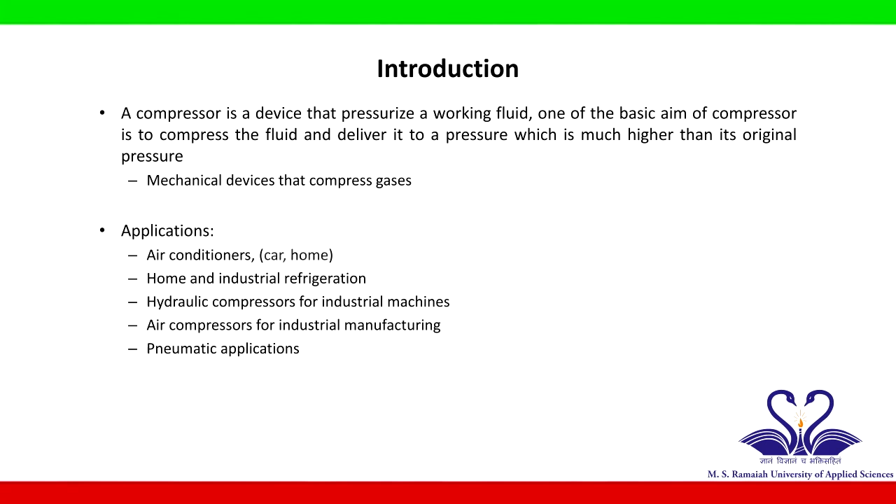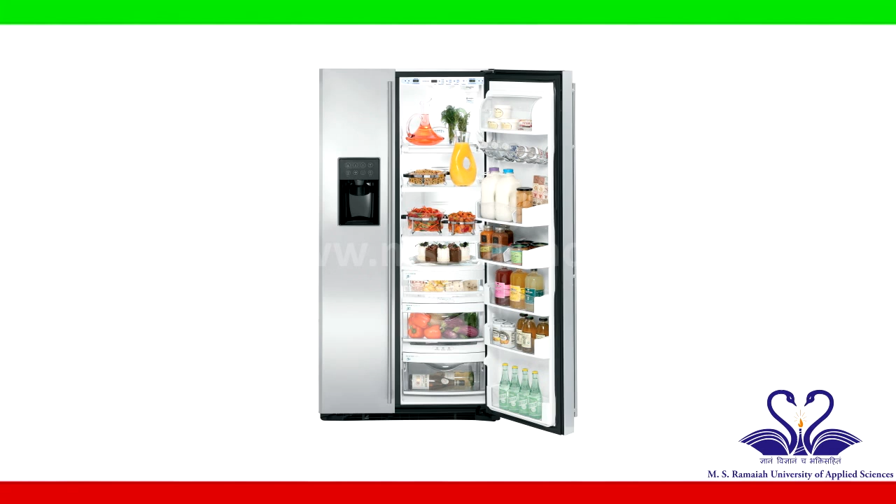Compressors are an important constituent in air conditioning, either domestic or industrial applications. Even in household refrigerators that follow the vapor compression refrigeration cycle, compressors are very much essential.

In refinery and process industries, compressors are used for handling highly volatile gases. For example, ammonia boils at about minus 33 degrees Celsius at atmospheric pressure. Hence, the product is compressed at high pressure and stored in high pressure vessels.

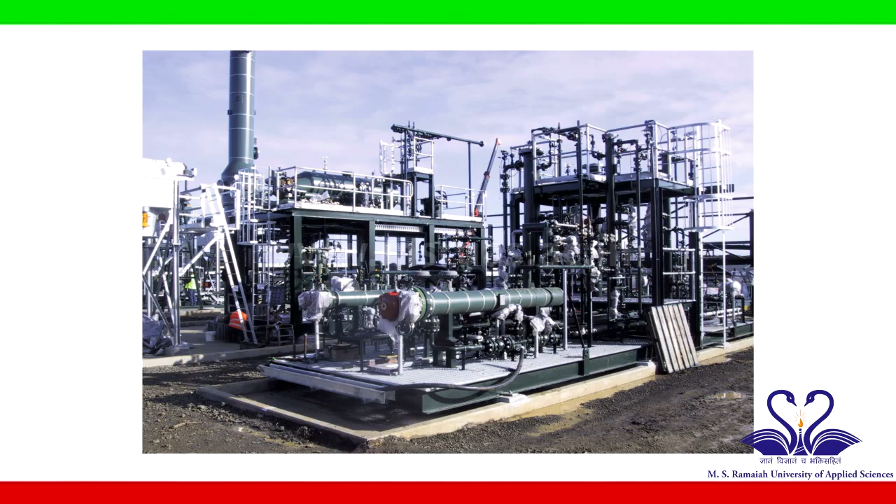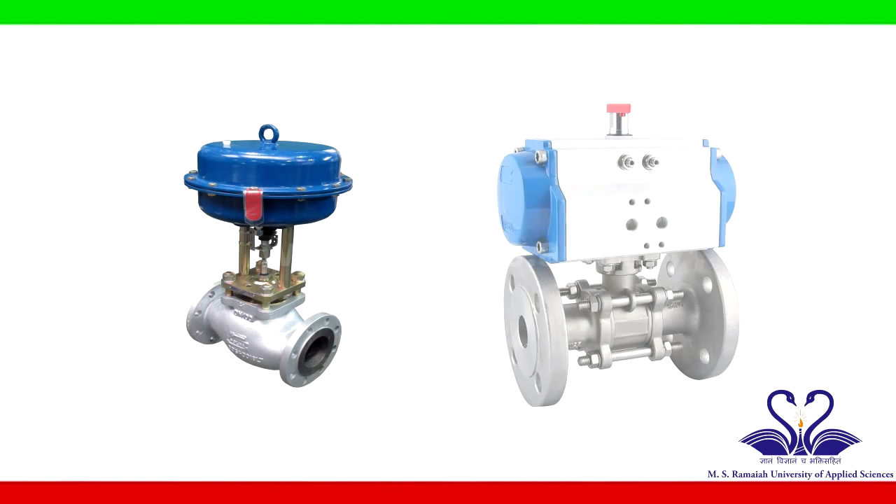Compressed air is also used in utility applications like cleaning of automobile air filters. Compressed air is required in actuating pneumatic and air control valves. By varying the air pressure to the actuators of the valves, different valve openings can be achieved.

Compressed air is also used in compressed air energy storage. In a power plant, during peak load times, high energy is required. During a period when there is very much less electric load, the surplus energy available can be stored in the form of compressed air. During peak load, the energy from the compressed air can be used to provide additional power.

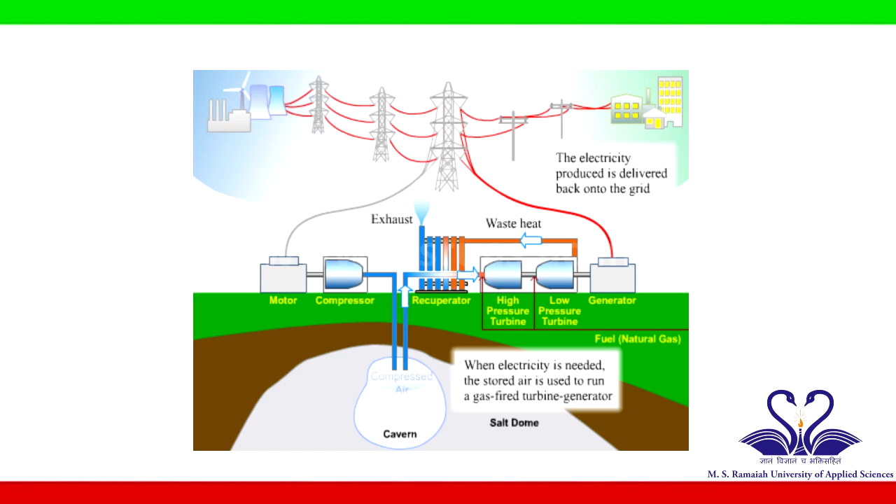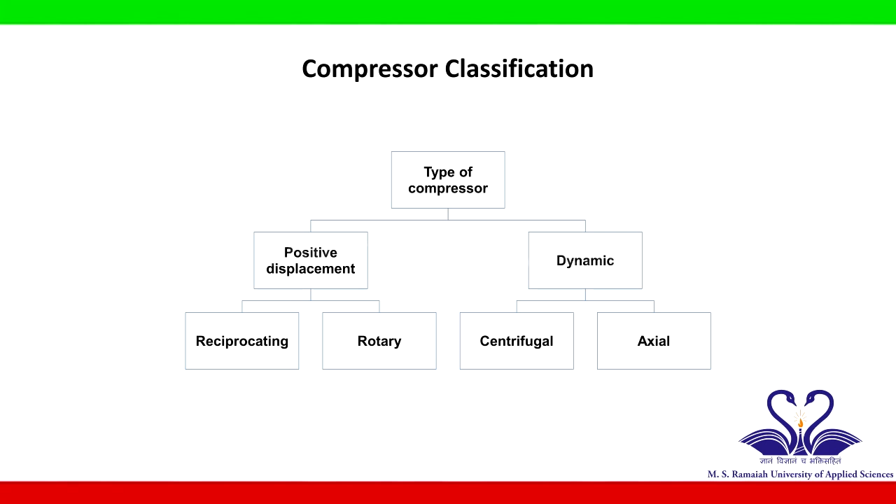Compressors may be classified as positive displacement and dynamic compressors. Positive displacement compressors can be further subclassified as reciprocating and rotary compressors. A dynamic compressor can again be subclassified as centrifugal and axial compressor.

A dynamic compressor is a continuous flow compressor characterized by a rotating impeller that adds velocity and thus pressure to the fluid. It is widely used in chemical and petroleum refinery industries for specific services.

Positive displacement compressors cause movement by trapping a fixed amount of air, then forcing or displacing that trapped volume into the discharge pipe.

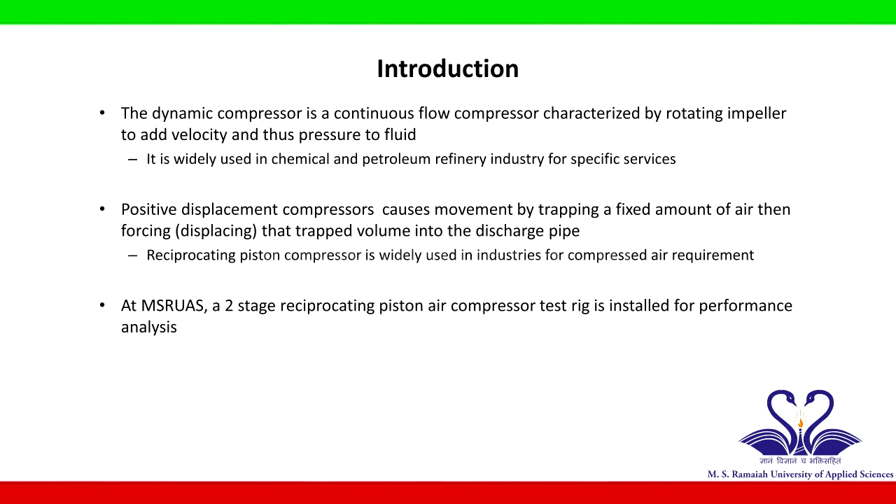Reciprocating piston compressors are widely used in industries for compressed air requirements. At MSRUAS, a two-stage reciprocating piston air compressor test rig is installed for performance analysis.

Before conducting the experiment, it is very important to understand the thermodynamics behind reciprocating compression. A thermodynamic state of a system is a condition identified by a set of state variables like pressure, temperature, etc. A thermodynamic process is any change that a system undergoes from one equilibrium state to another.

Some of the important thermodynamic processes are: isobaric process, where pressure remains constant; isochoric process, where volume remains constant; isentropic process, where entropy remains constant; and adiabatic process, where there is no exchange of heat between system and surroundings, or in other words, PV to the power gamma is a constant.

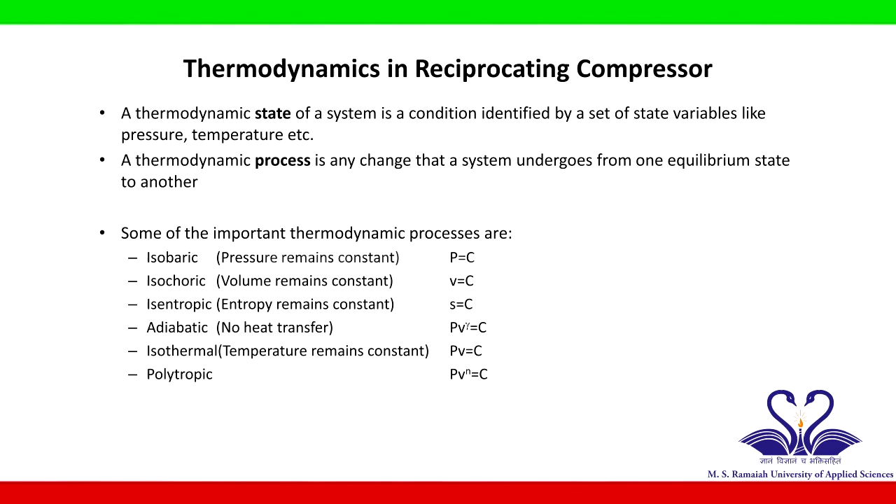Isothermal process, where temperature remains constant, or PV is a constant. And polytropic process, where PV to the power n is a constant, and n is the polytropic index.

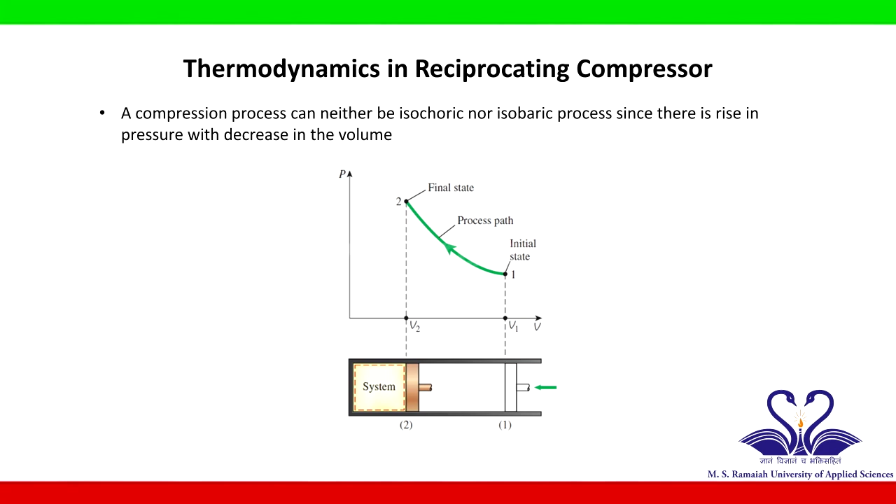A compression process can neither be isochoric nor isobaric, since there is a rise in pressure with a decrease in volume. Hence, the compression process may be one among the following. If the rise in pressure and decrease in volume of the system takes place at constant temperature, then the process may be isothermal.

If there is no heat transfer between system and surroundings, it can be an adiabatic process. If the adiabatic process is reversible, then the process becomes isentropic. If none of the above conditions follow, then the process can be just termed as polytropic with the polytropic index N. On a PV diagram, the isothermal lines have a lesser slope when compared to isentropic lines.

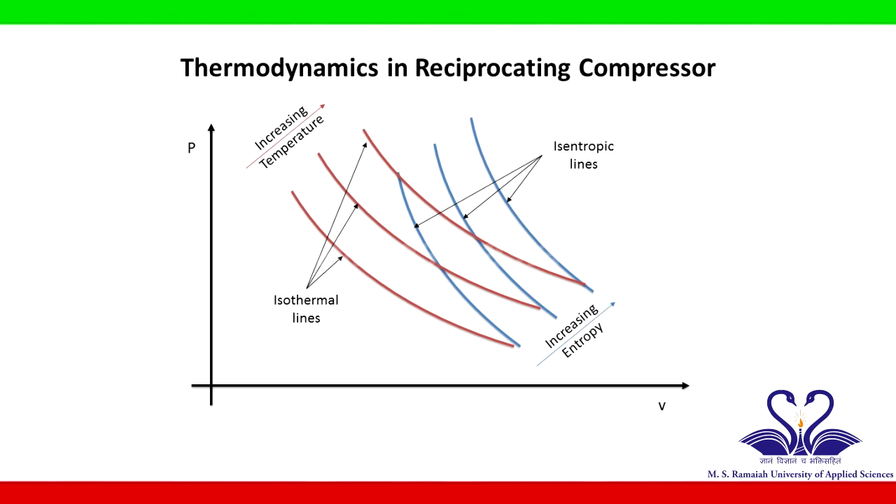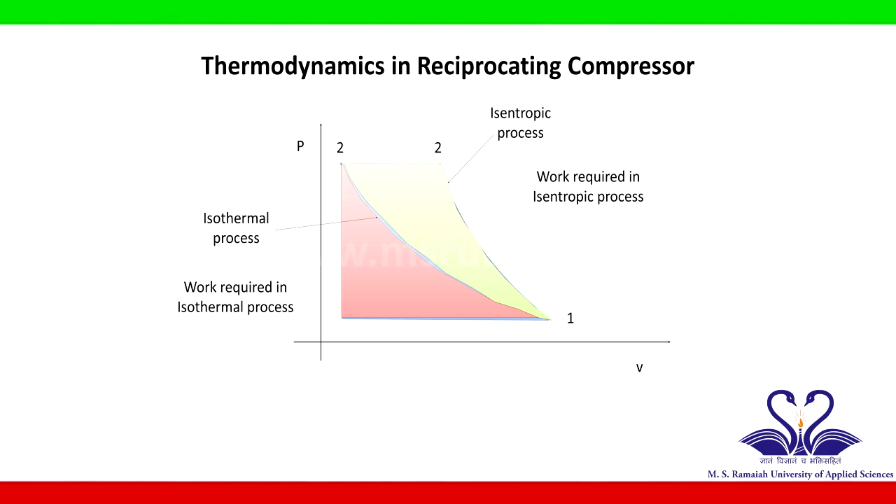The isothermal and isentropic lines can be observed in the figure. For a compression of a system from state 1 to state 2, the isentropic process requires higher work input compared with the isothermal process. It would be more efficient if the process operated at isothermal conditions. It is evident that during compression, the isothermal process requires less energy compared to the isentropic process.

In reality, the isothermal process is practically difficult to achieve, which is possible only at a quasi-static condition. An isentropic process is also not achievable, since the system entropy is increasing during compression.

Since the compression process happens very quickly, it can be assumed that the heat transfer between system and surrounding is negligible. Hence, the compression process can be suitably assumed to be adiabatic.

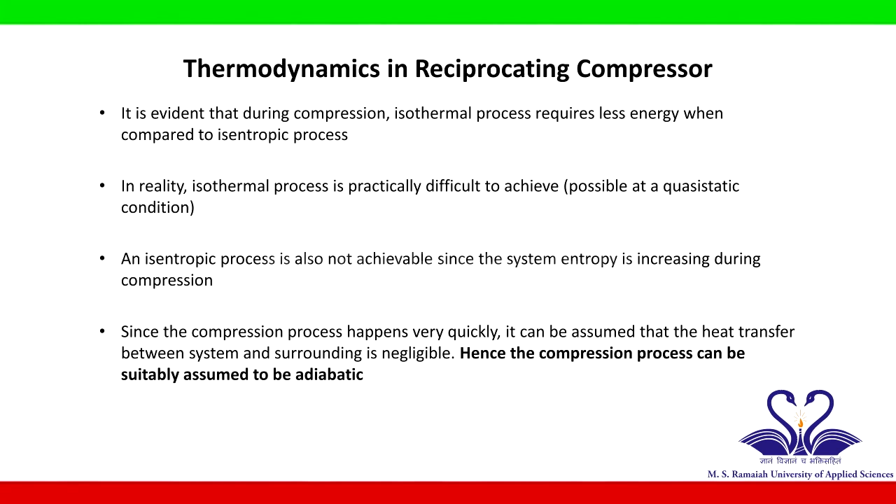The work done in a polytropic process can be written as W(1 to 2) equals N by (N minus 1) into M R T1 into (P2 by P1) to the power (N minus 1 by N) minus 1, where N is the polytropic index, gamma if adiabatic.

M is the mass of the system in kg. R is the gas constant for the gas in joule per kg Kelvin; for air, it is 287 joule per kg Kelvin. T1 is the temperature of the system before compression in Kelvin. P1 is the pressure of the system before compression in pascals. P2 is the pressure of the system after compression in pascals.

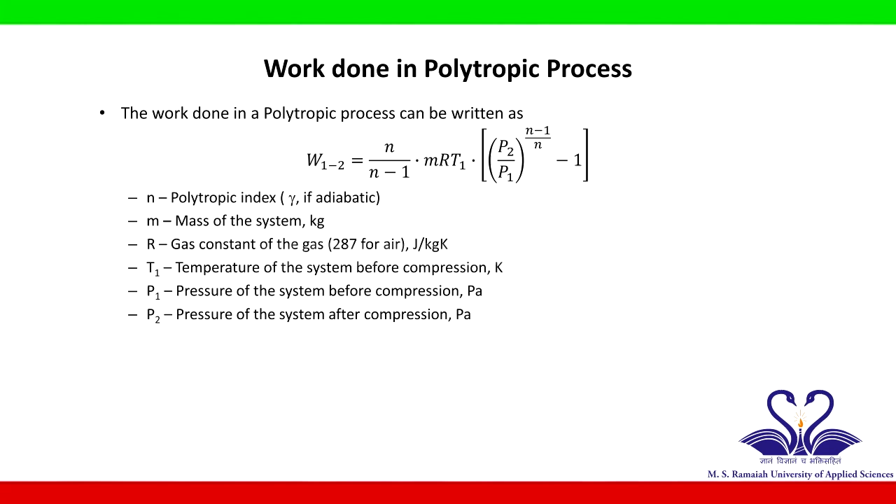The power output of the compressor can be calculated by replacing mass of the system by mass flow rate. Power(1 to 2) equals N by (N minus 1) into M-dot R T1 into (P2 by P1) to the power (N minus 1 by N) minus 1, where M-dot is the mass flow rate in kg per second.

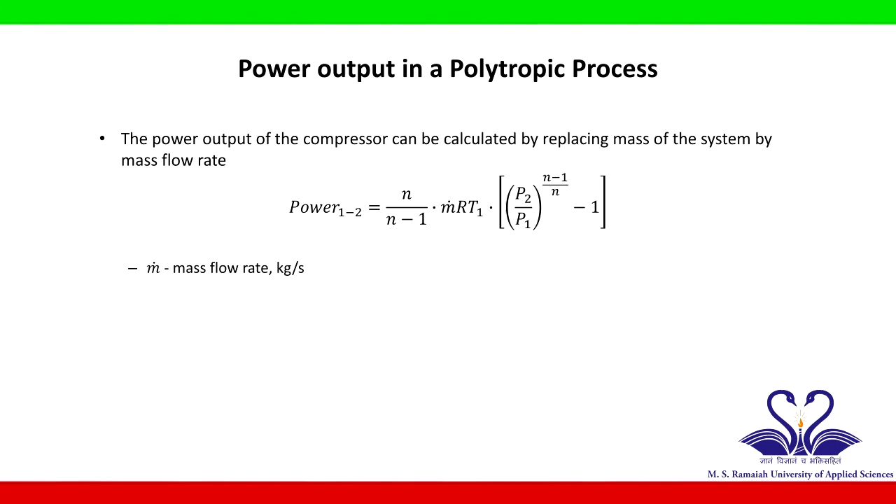As discussed before, during compression from state point 1 to 2, the work requirement in a polytropic process is considerably higher than that of an isothermal process.

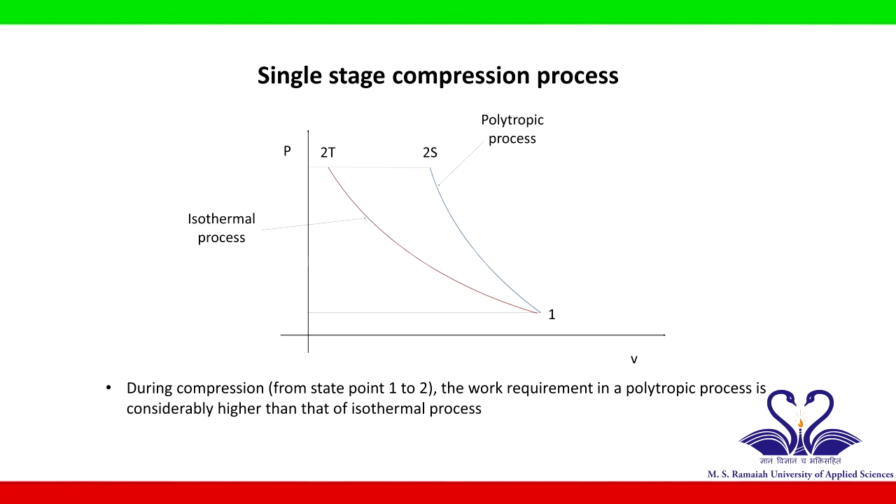In order to reduce the energy input for compression, the process can be split into two stages with intercooling in between. A low pressure stage, or LP stage, where the system pressure is raised to a slightly higher pressure, that is, pressure increases from P1 to P2.

Rise in pressure is accompanied by rise in temperature according to Gay-Lussac's law. The temperature rises from T1 to T2.

An intercooler reduces the temperature of the system, keeping the system at the higher pressure. Temperature drops from T2 to T3, whereas pressure P3 remains the same as P2.

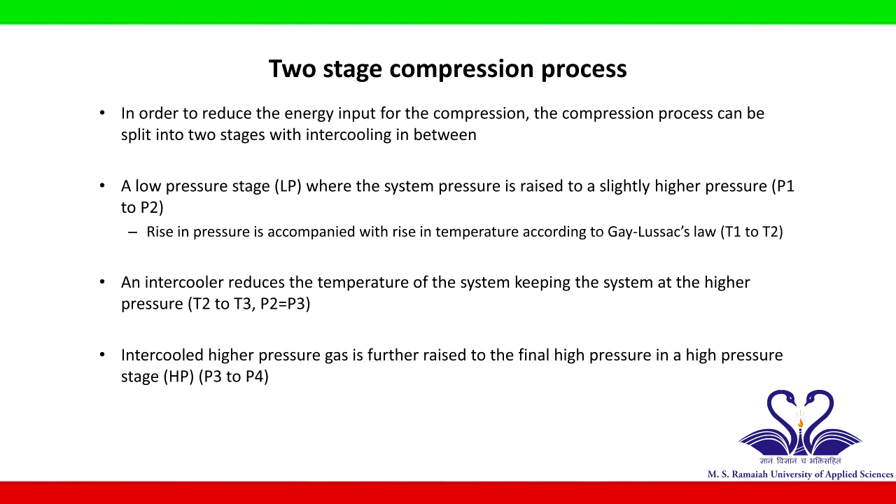The intercooled higher pressure gas is further raised to the final high pressure in a high pressure stage, or HP stage. Here, the pressure increases from P3 to P4.

The compression processes can be plotted on a PV diagram. The line 1 to 4T represents the isothermal process. If the compression happened in a single stage, the process would follow the path 1 to 4S.

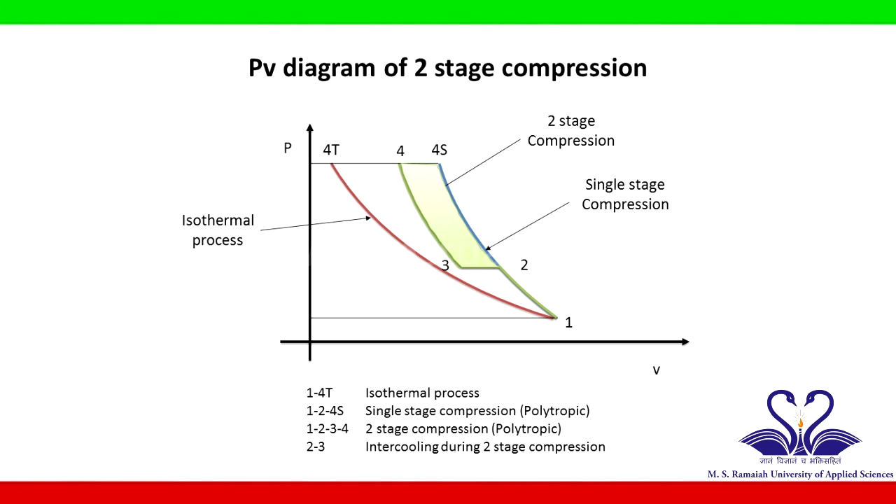For the two-stage compression, the system follows the path 1 to 2, 2 to 3, 3 to 4, where 1 to 2 is the first stage compression, 2 to 3 is the intercooling stage, and 3 to 4 is the second stage compression. It can be observed that the work requirement is definitely reduced with two-stage compression compared to a single stage.

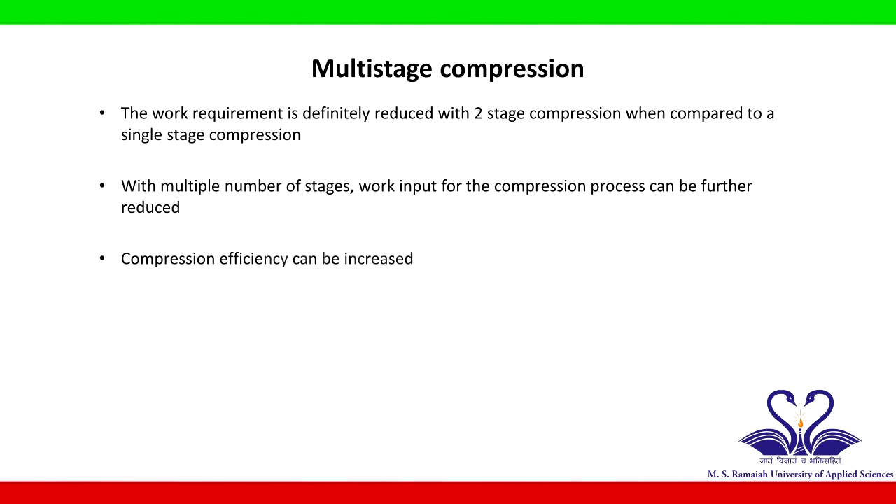With multiple stages, the work input for the compression process can be further reduced. By reducing the work input to the compressor, the efficiency of compression can be increased.

At MSR UAS, a two-stage reciprocating air compressor test rig has been installed. The setup consists of an LP stage, HP stage, intercooler, and an air receiver to store the compressed air.

The air enters the circuit at atmospheric conditions, that is, pressure P1 and temperature T1, through an orifice. The orifice is connected to a U-tube water manometer, which can be used to calculate the discharge or volumetric flow rate of the air. The air then enters the LP stage for the first stage compression.

The outlet of the first stage has both increased pressure and temperature, that is, P2 and T2.

This high pressure and temperature air is passed through an intercooler, where the temperature of the air is reduced by keeping the pressure constant. The intercooler is an air-to-air heat exchanger.

On the outside, atmospheric air is forced to move around the fins of the intercooler, which picks up heat from the hot pressurized air.

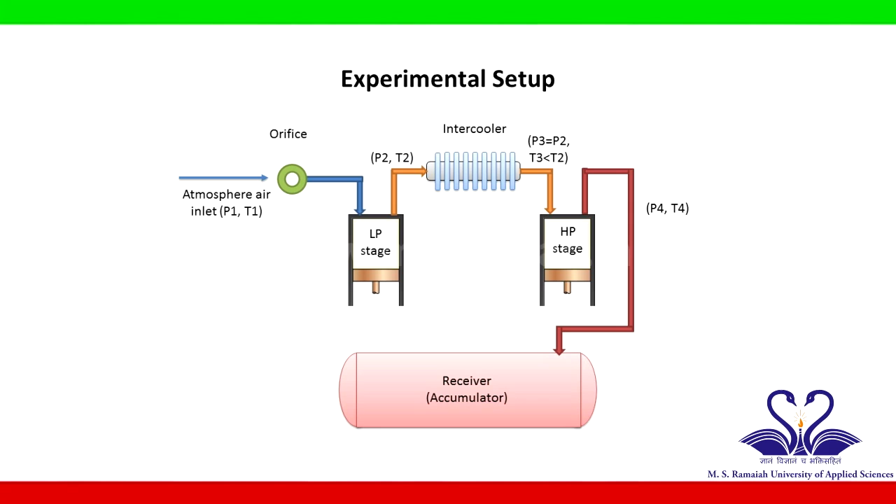Measurement of state variables is very important in this experiment. The four different state points are: 1, before LP stage; 2, after LP stage or before intercooler; 3, after intercooler or before HP stage; 4, after HP stage. From the state postulate, we know that at least two variables are required to define the state of the system.

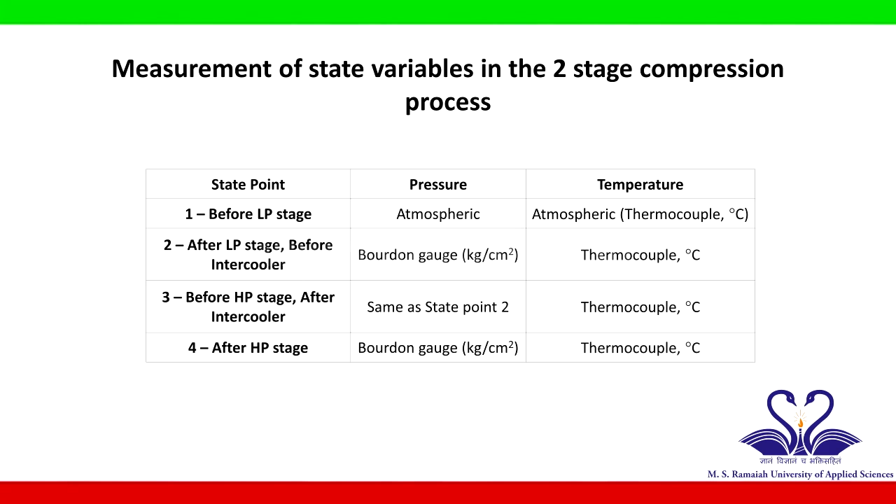Here, the pressure and temperatures at the different states are measured using Bourdon tube gauges and thermocouples.

Compressor efficiency may be defined as the ratio of compressor power output to the input power. Compressor efficiency equals power 1 to 2 plus power 3 to 4, divided by power input, into 100, where power 1 to 2 is the power output of the compressor in process 1 to 2 in watts, and power 3 to 4 is the power output of the compressor in process 3 to 4 in watts.

The input power to the compressor is calculated using the energy meter as: power input equals N into 3600 into 1000 into eta mechanical, divided by energy meter constant into T, in watts. N is the number of blinks on the energy meter, T is the time required for N blinks in seconds, and eta mechanical is the mechanical efficiency.

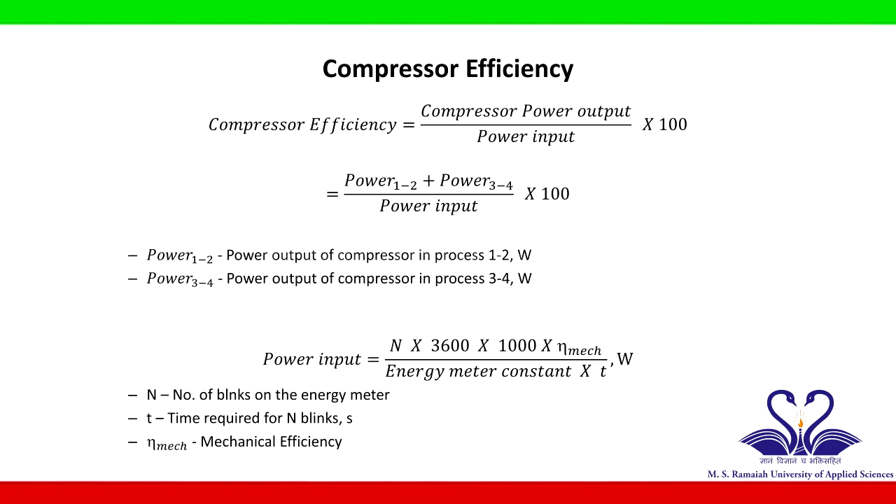The volumetric efficiency of both LP and HP stage compressors can also be calculated. Volumetric efficiency of a compressor may be defined as the ratio of actual volume of air intake to the stroke volume of the piston. Volumetric efficiency for the reciprocating compressor is calculated using volumetric flow rates as: volumetric efficiency equals actual volumetric flow rate divided by theoretical volumetric flow rate into 100, where theoretical volumetric flow rate equals pi d squared by 4 into L into N by 60, in meter cube per second.

D is the diameter of the cylinder in meters, L is the stroke length of the piston in meters, and N is the speed of the crankshaft in revolutions per minute.

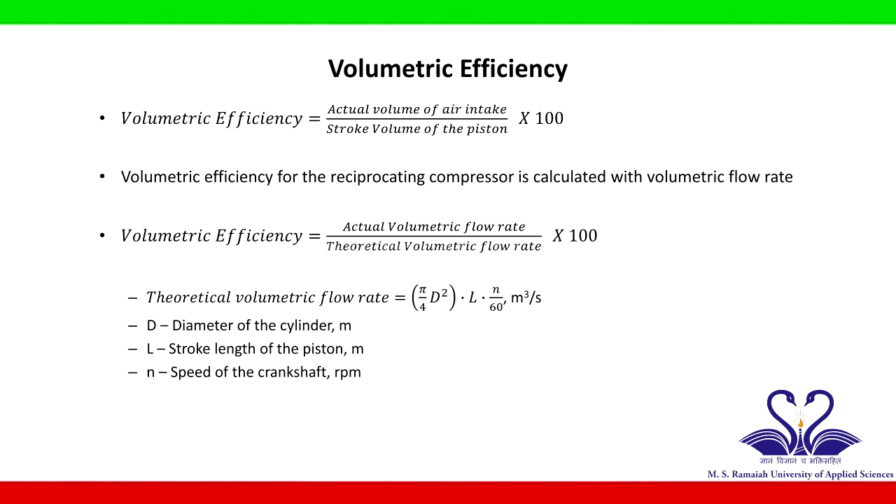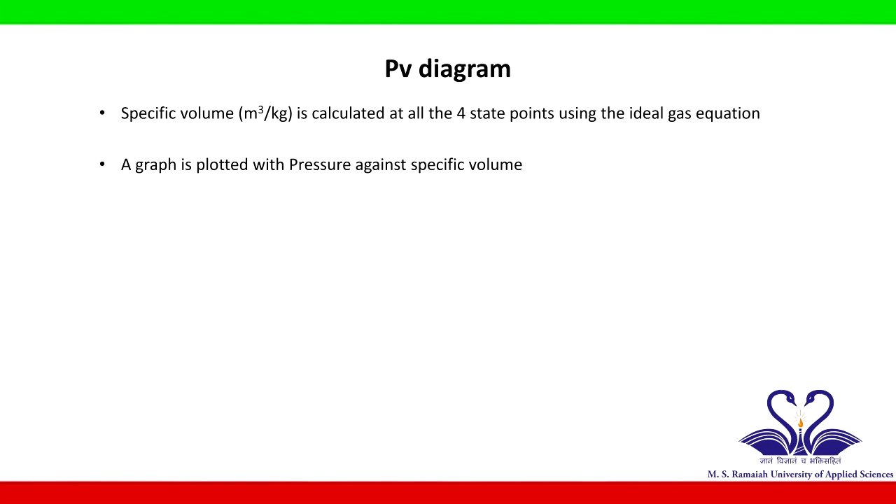Specific volume, that is meter cube per kg, is calculated at all 4 state points using the ideal gas equation, and a graph is plotted with pressure against specific volume.

Hello everyone. Today we will be conducting an experiment on a 2-stage reciprocating air compressor. Here we are having 2 stages of compression, where in one stage there will be low pressure compression, and in the other stage we will be having high pressure compression.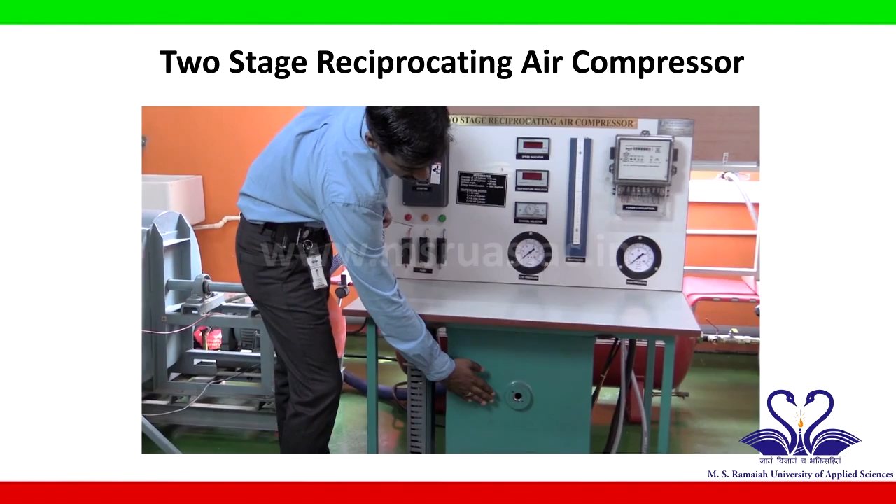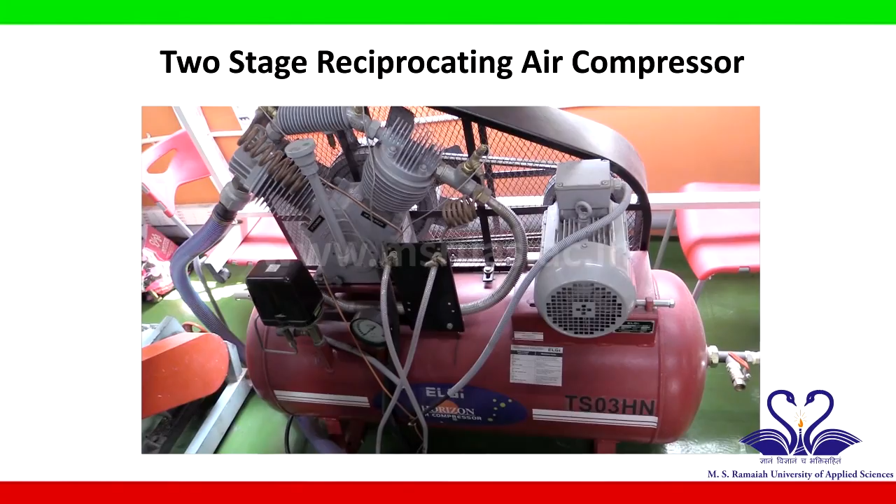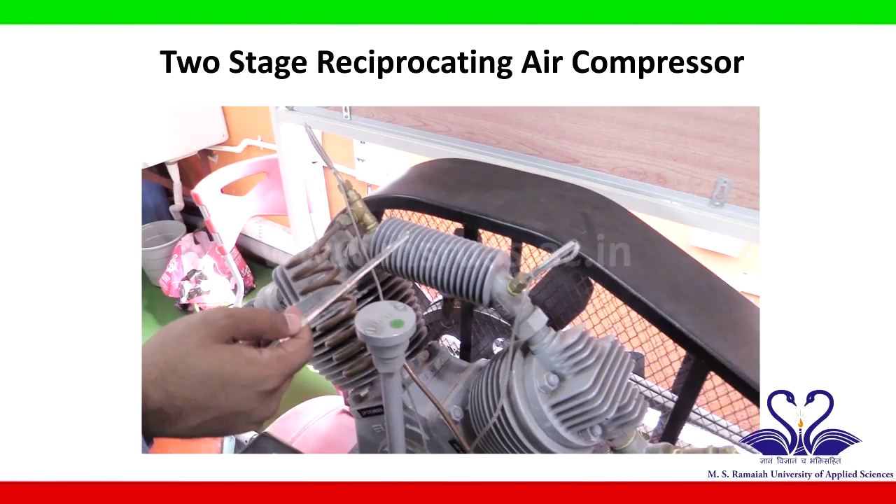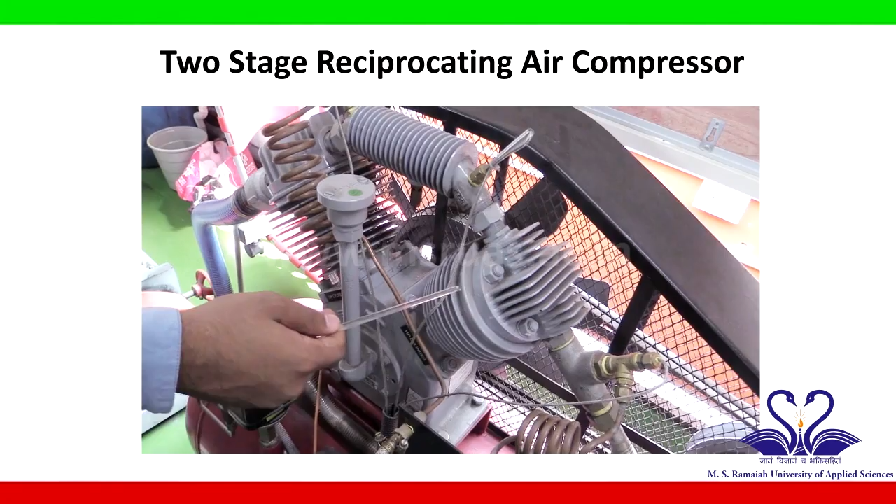The air enters the system through the orifice present over here. Air from the orifice moves through this pipe and then enters the low pressure cylinder. This is the LP cylinder, where the air gets compressed to a lower pressure, and then this pressurized gas enters the high pressure cylinder over here. Here the pressure of the air is further increased, and then finally the high pressure air enters the accumulator over here.

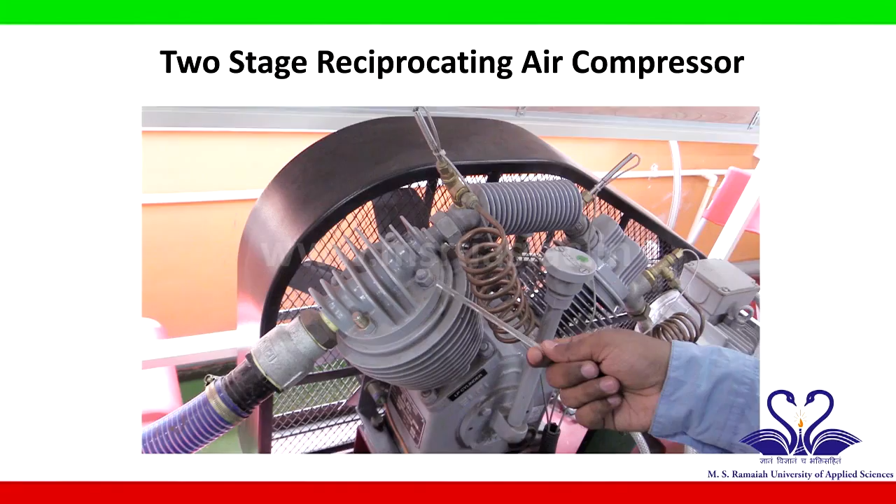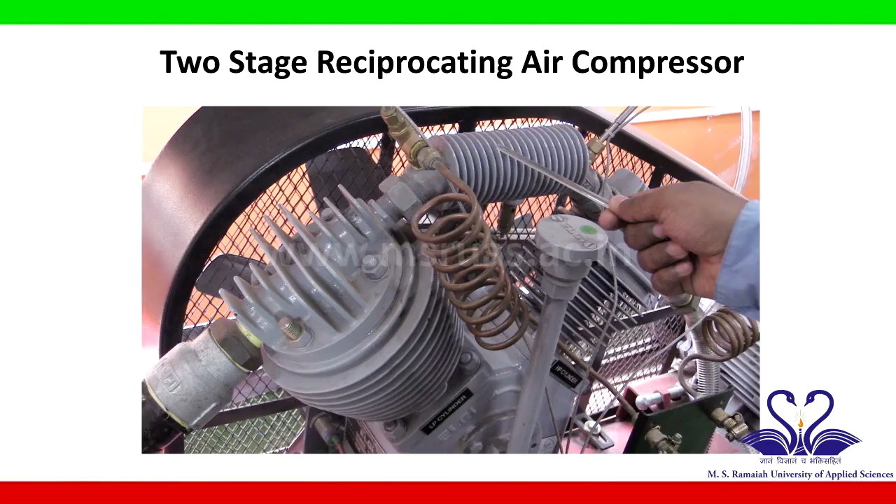The compressed air at the outlet of the low pressure cylinder will be of higher pressure and higher temperature as well, so the high temperature air will be reduced of its heat through an intercooler. This is the intercooler, an air-to-air heat exchanger where the high temperature at the output of the low pressure cylinder has been reduced by about 5 to 7 degrees, and then the lower temperature air enters the HP cylinder, and the final higher pressure air goes into the accumulator.

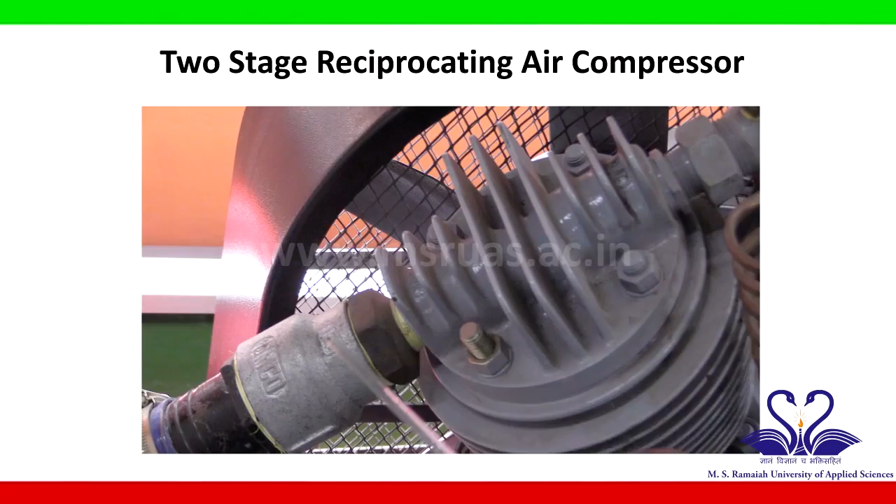In this experimental setup we can measure 4 temperatures of the air: one temperature at the inlet of the low pressure cylinder, another at the outlet of the low pressure cylinder, a third temperature measured at the inlet of the HP cylinder, and the fourth measured at the outlet of the HP cylinder. All the temperatures are measured using thermocouples.

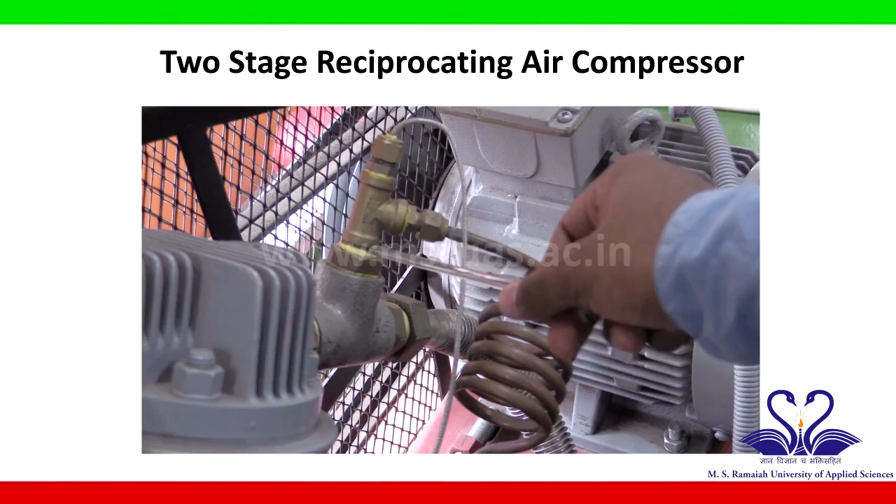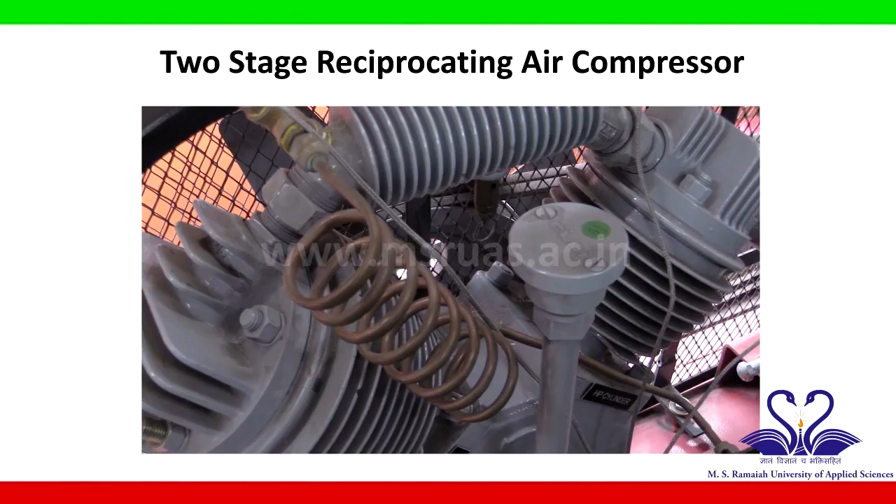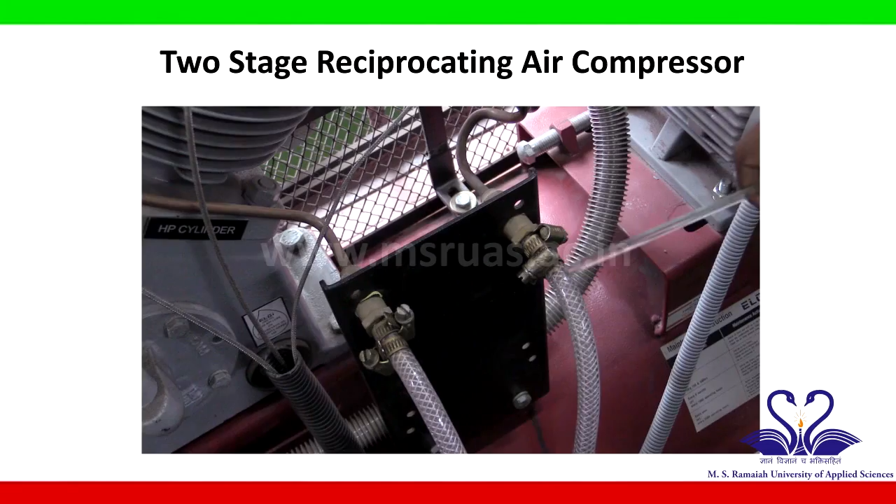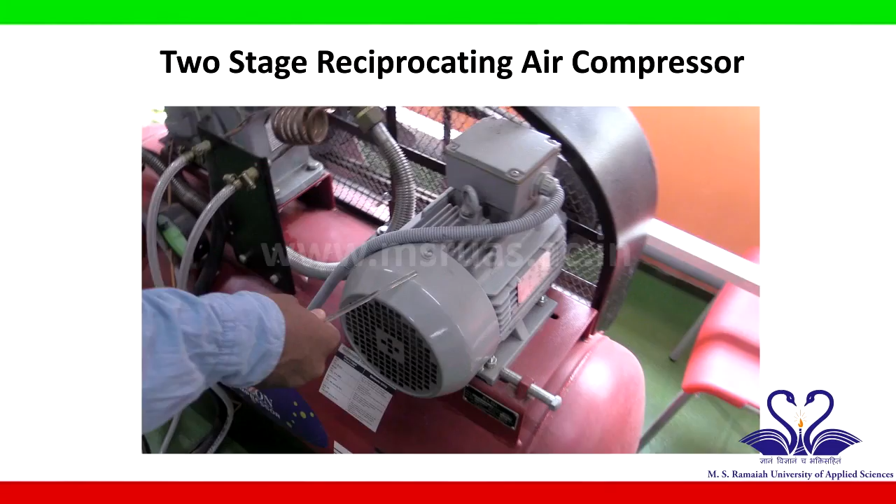The outlet pressure of the LP cylinder can be measured using this tapping, and the outlet of the HP cylinder pressure can be measured using this tapping. Both tappings, one for the LP pressure and one for the HP pressure, can be measured using a bourdon tube. The power input to the compressor is given by a 3-phase induction motor. It is a 2.2 kilowatt motor, and the power is transmitted through a belt drive.

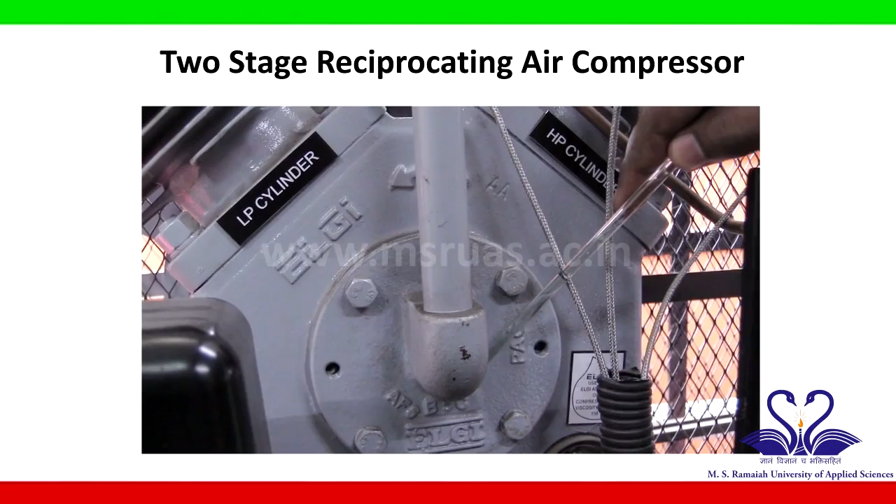On the same shaft of both the compressor cranks, a fan is being fitted. It is an induced draft fan which will allow the air to pass over the intercooler. Both the cranks of the HP cylinder and the LP cylinder are connected to a common shaft, and on the same shaft an induced draft fan is present.

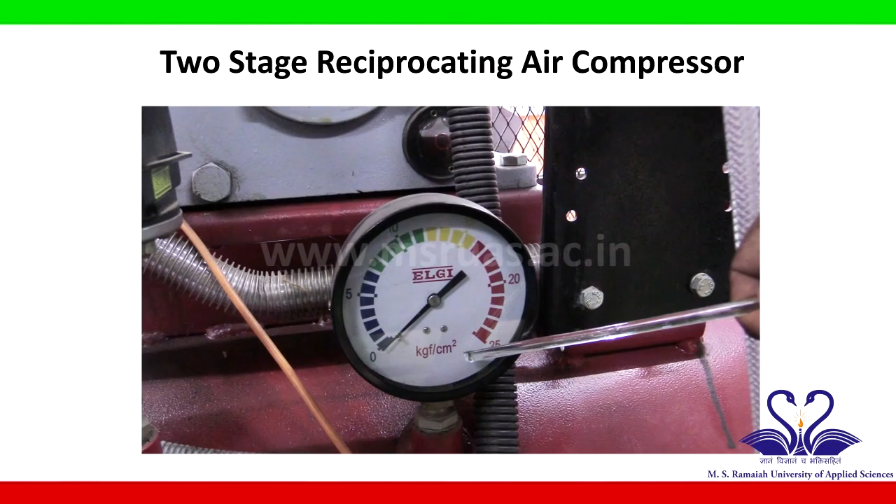The pressure of the accumulator can be observed on this Bourdon gauge. The pressure is in terms of kg per centimeter square.

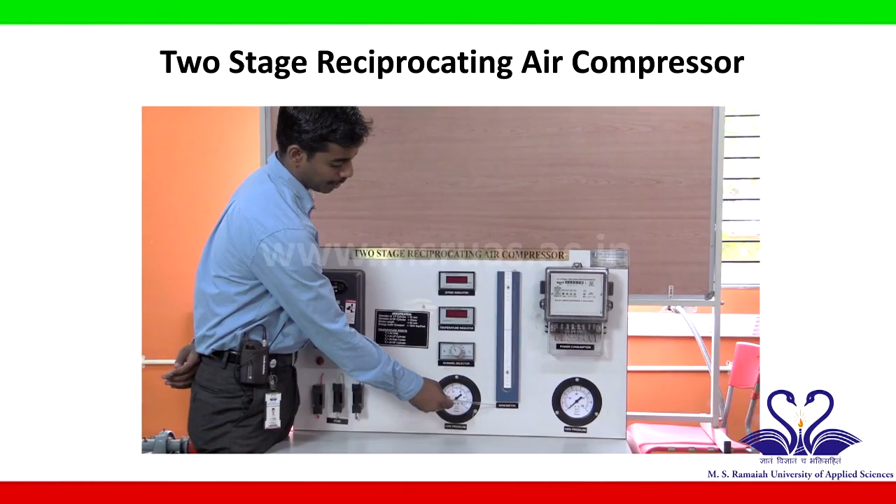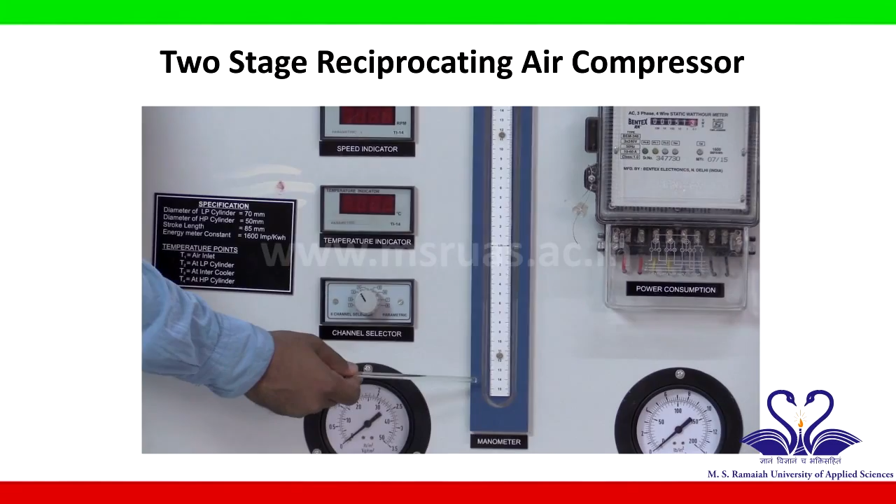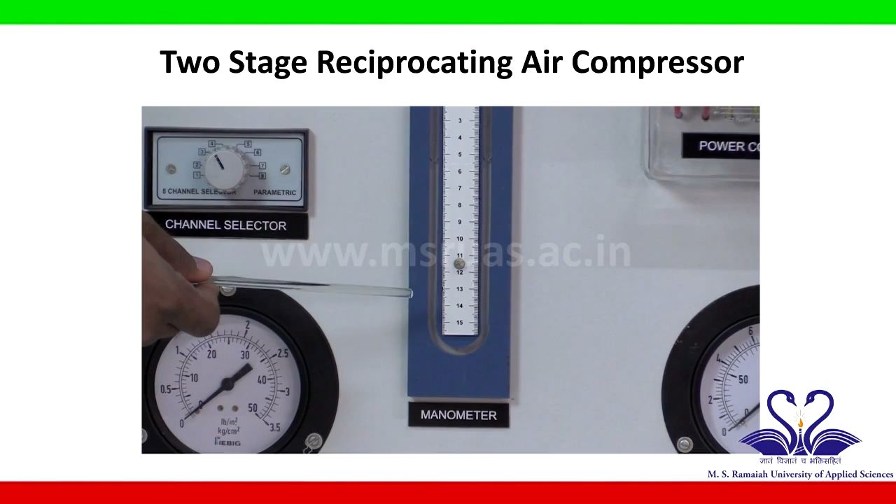On the panel of the experimental setup, we have a manometer. It is a U-tube manometer consisting of water as the manometric fluid. This manometer is used to measure the discharge of air flowing across the orifice. When the air flows across the orifice, there is a pressure drop, and that pressure drop can be seen as a difference in height of the water column.

We have a Bourdon gauge which measures the low pressure of the LP cylinder. Here the pressure is in terms of kg per centimeter square.

The final high pressure of the HP cylinder output can be measured on this Bourdon gauge. Here also the pressure is in terms of kg per centimeter square.

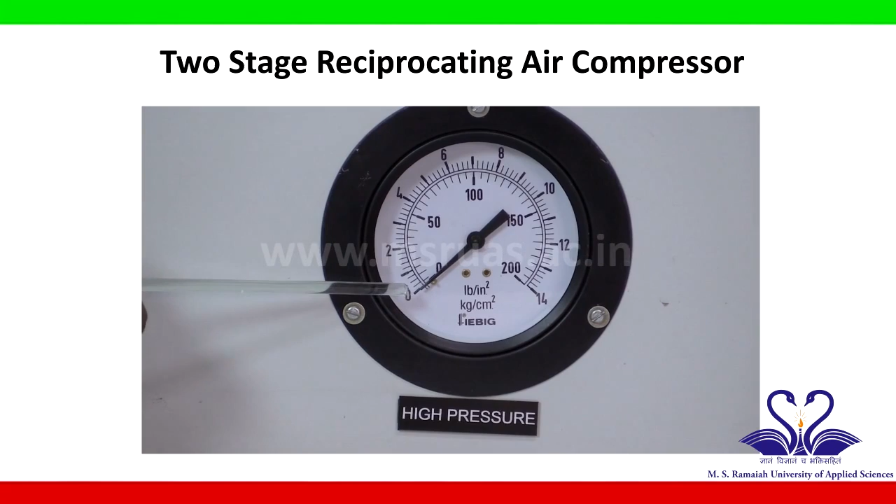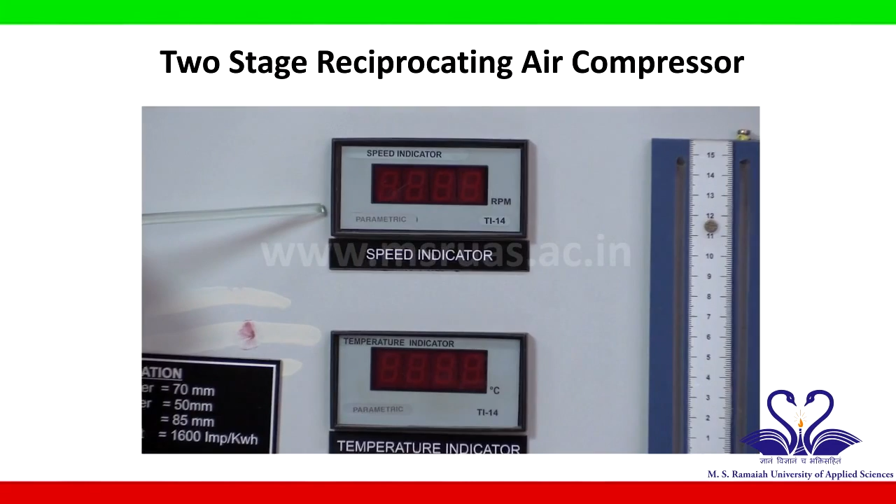The speed of the shaft of both the HP as well as the LP cylinder can be measured over here. The speed can be measured in terms of revolutions per minute.

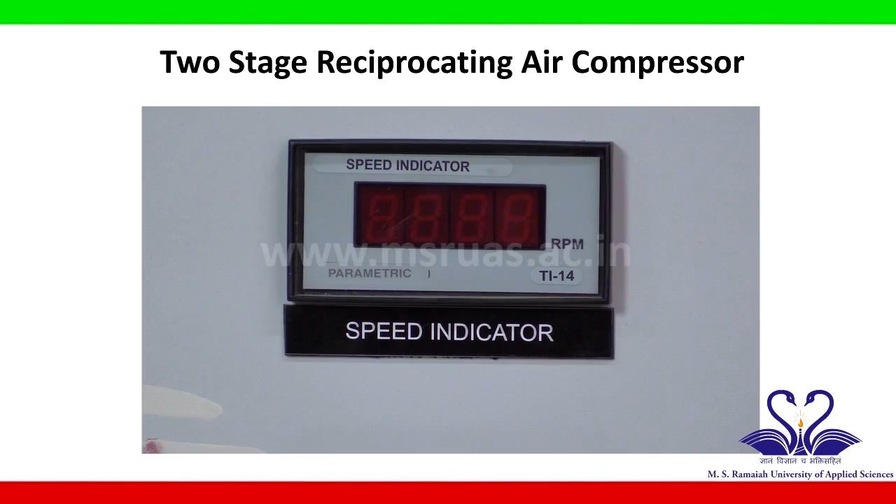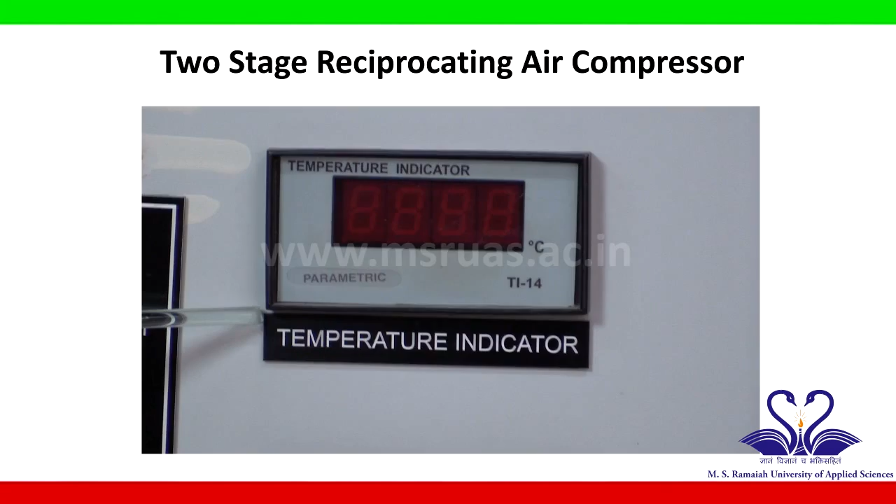As mentioned before, we have 4 temperatures that can be measured on the setup. All the 4 temperatures can be observed on a common LED indicator. To actually see all the 4 temperatures, we can toggle using this toggle present over here. We can measure T1, T2, T3 as well as T4.

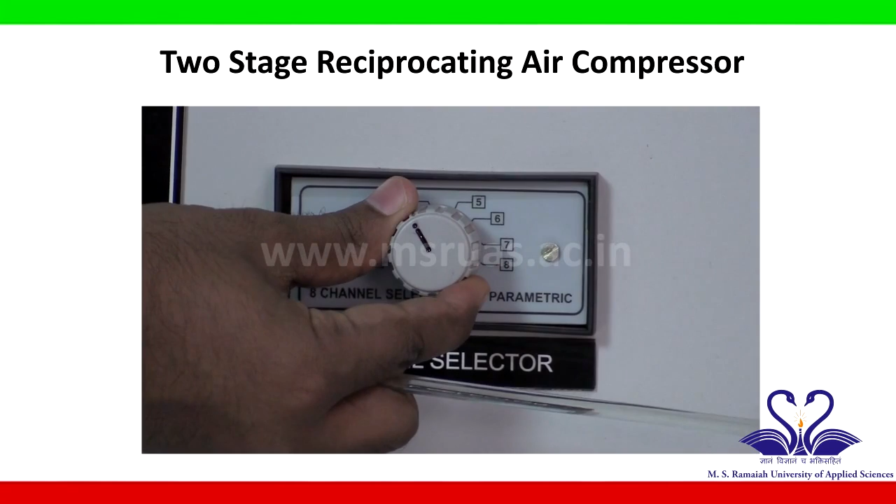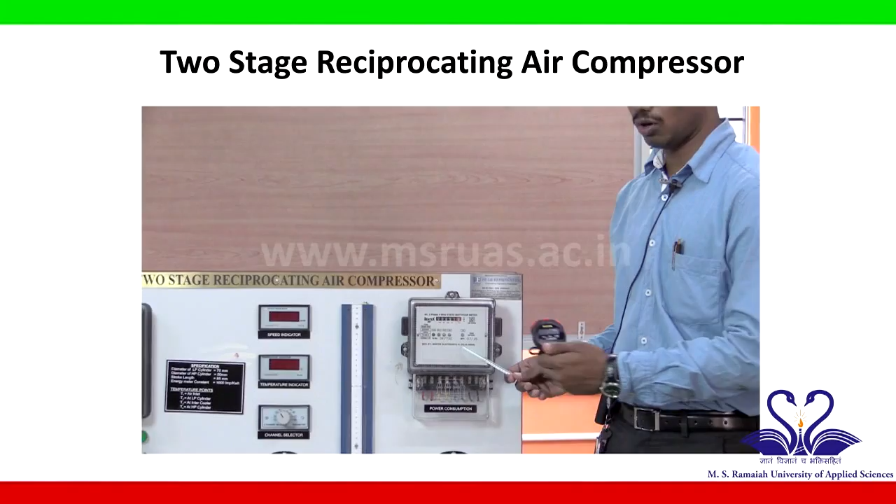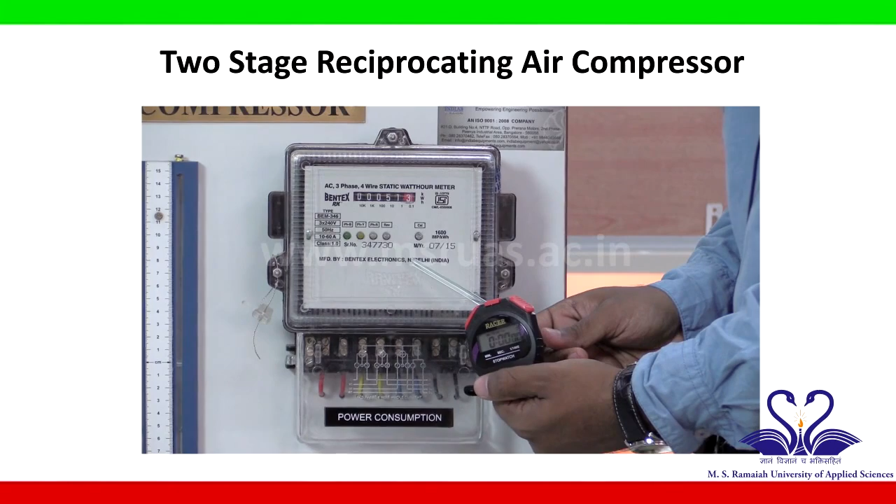The power input to the electric motor can be measured using an energy meter. Here we can note down the time required for a particular number of blinks on the energy meter, and by using a suitable formula we can calculate the power input to the electric motor.

Let us now start the experiment. Before starting the experiment, we have to ensure that the outlet valve of the accumulator must be completely closed.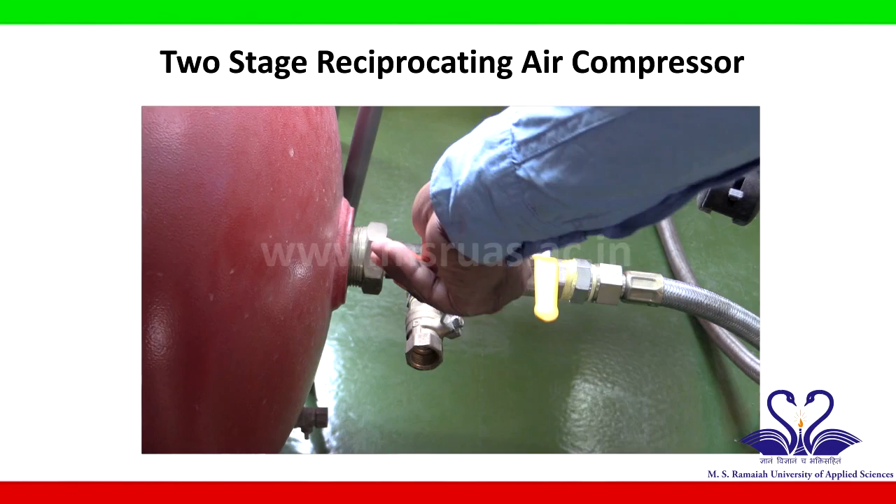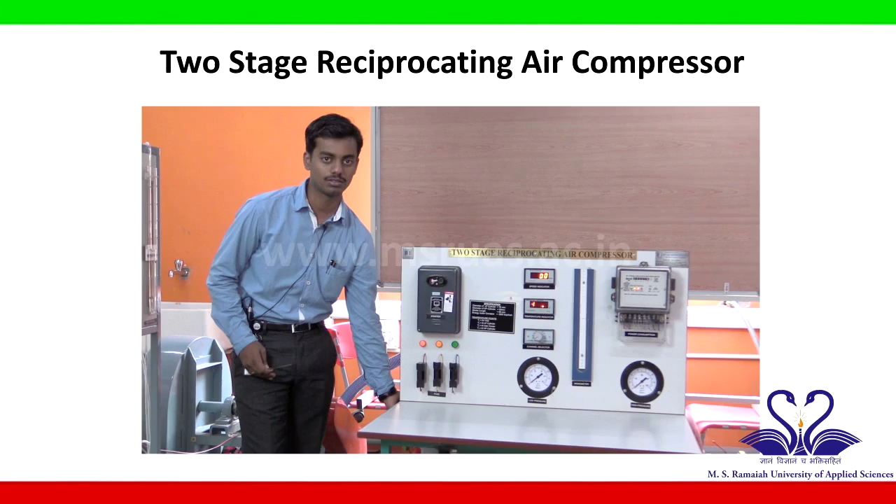Now we will switch on the panel by starting the MCB switch. Once the MCB is switched on, we can observe that the LED on both the LED indicators is coming on.

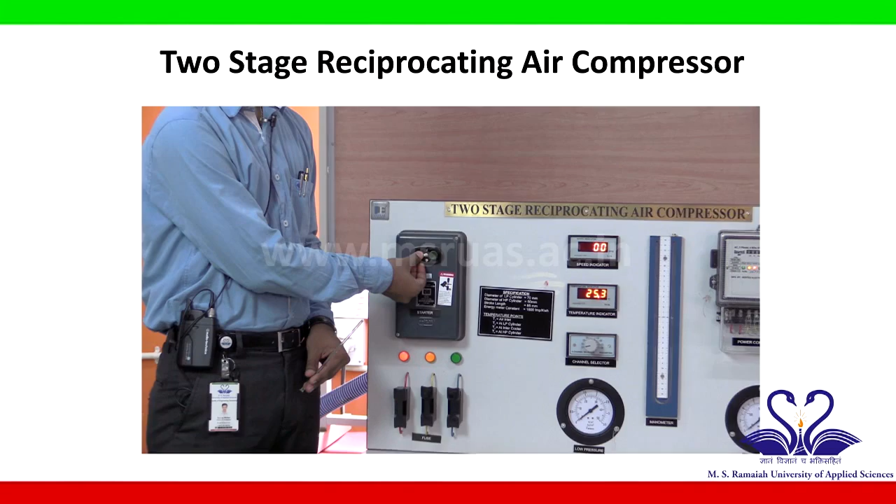Now we shall start the compressor by switching on the motor by removing the red button.

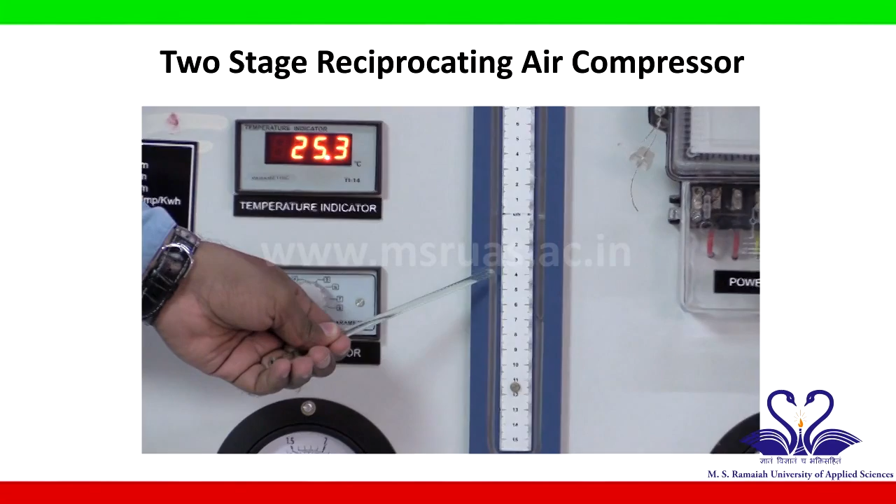Now we can observe that there is a difference in the liquid column of the manometer. Using this height difference, we can calculate the actual discharge of the air flowing through the orifice into the system.

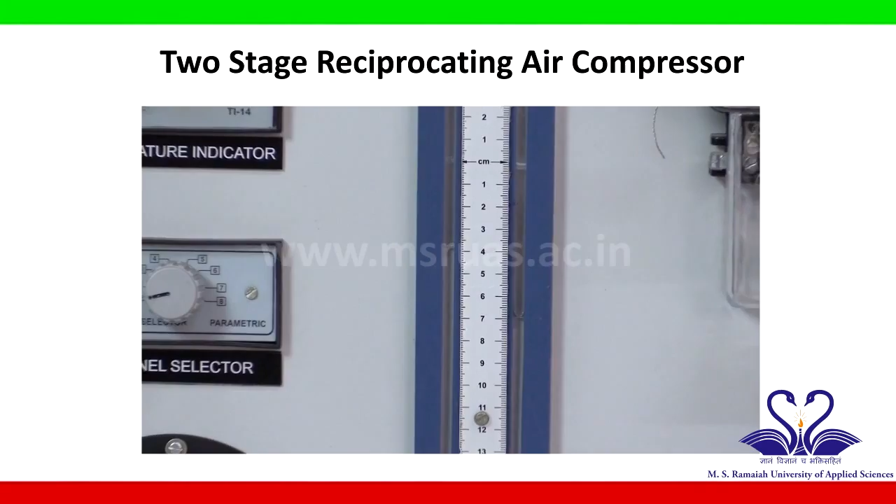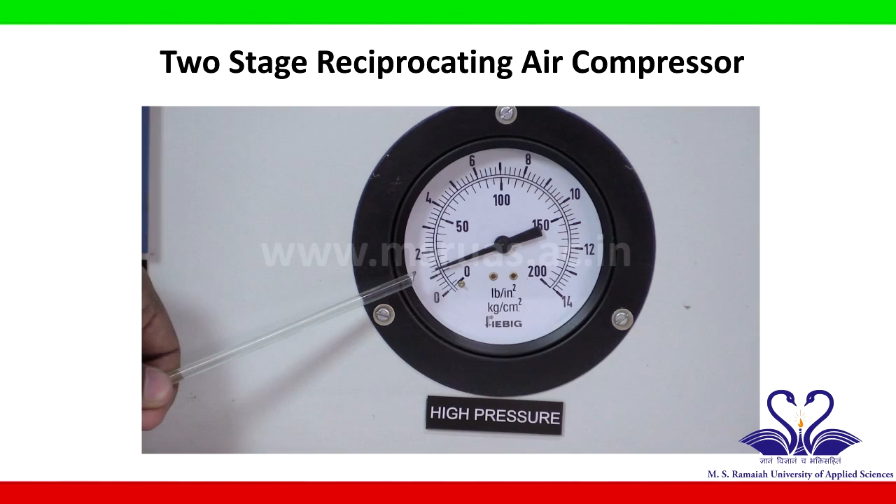We can also observe on the low pressure Bourdon gauge that the pressure is gradually rising. Also, there is a gradual rise in the high pressure Bourdon gauge as well.

Once the high pressure is reaching around 2 kg per centimeter square, then we shall take down all the readings of the temperature as well as the energy consumed by the electric motor.

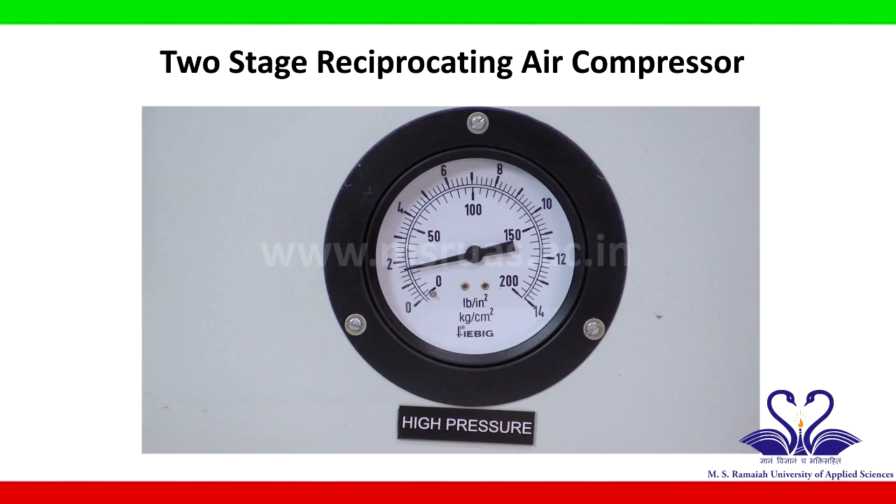Now we can observe that the pressure of the high pressure cylinder has reached about 2 kg per centimeter square. At this pressure, we shall note down all the 4 temperature readings.

At T1, the temperature is about 25.4. At T2, the temperature has risen to about 70.5 degrees Celsius.

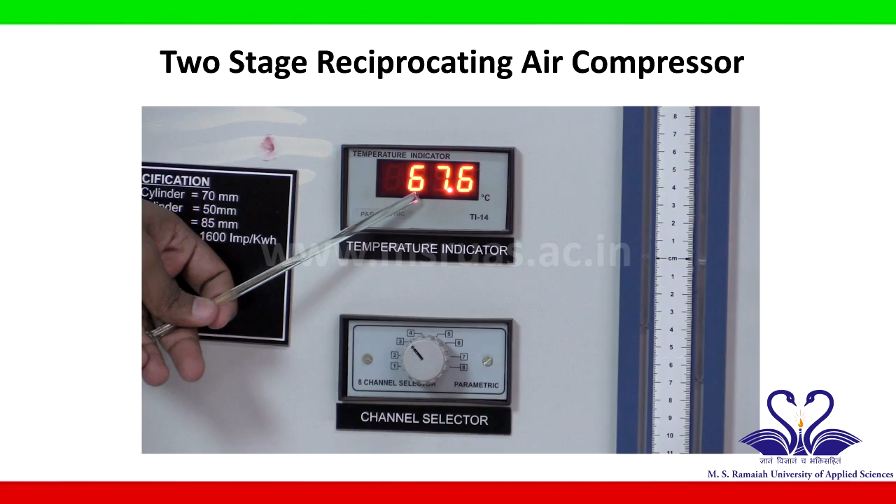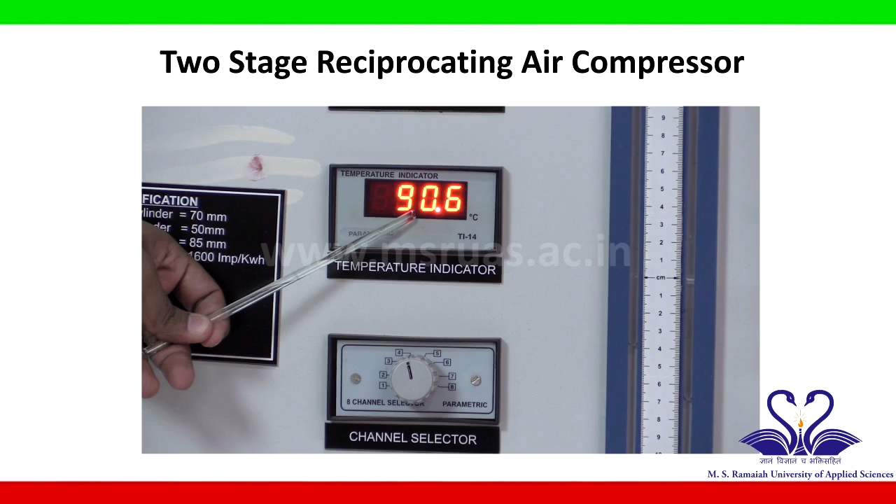T3 would be after the intercooler, which will show a drop in temperature of about 67.6 degrees Celsius, and T4 would be the final output temperature, which is the maximum, showing about 91 degrees Celsius.

The speed of the shaft can be noted down using the speed indicator. It is showing a value of about 924 revolutions per minute.

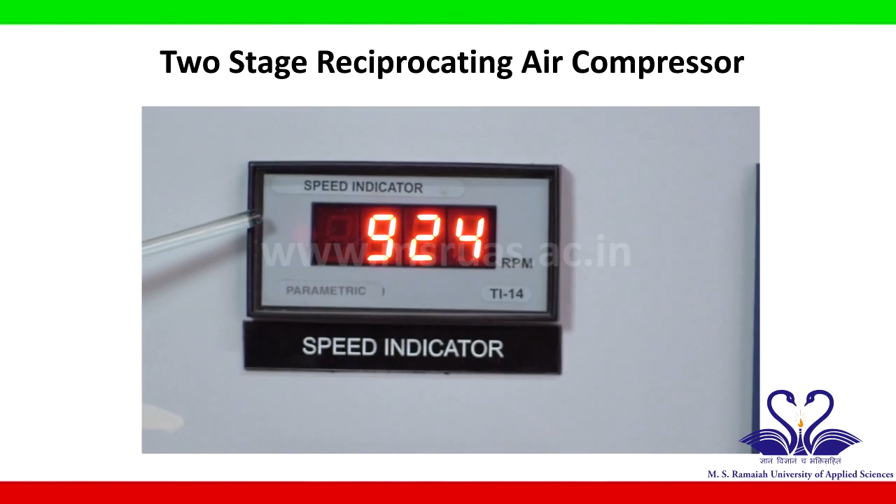The energy input to the electric motor can be calculated using the energy meter. Here we take down the time for a particular number of blinks on the energy meter.

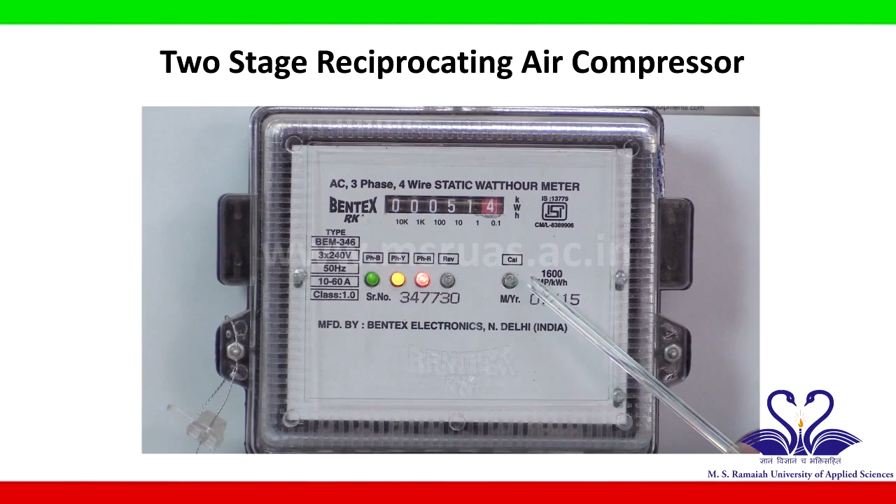The readings of low pressure, high pressure, manometer levels and the temperatures have been taken down at 2 kg per centimeter square of the HP cylinder pressure.

Now this experiment can be repeated at different readings of the HP cylinder pressure. Let's say 4 kg, 6 kg and 8 kg per centimeter square of the HP cylinder pressure.

Once all the readings have been taken, we can calculate the efficiency of the compressor, as well as the volumetric efficiencies of each of the LP and HP cylinder. That concludes the experiment.